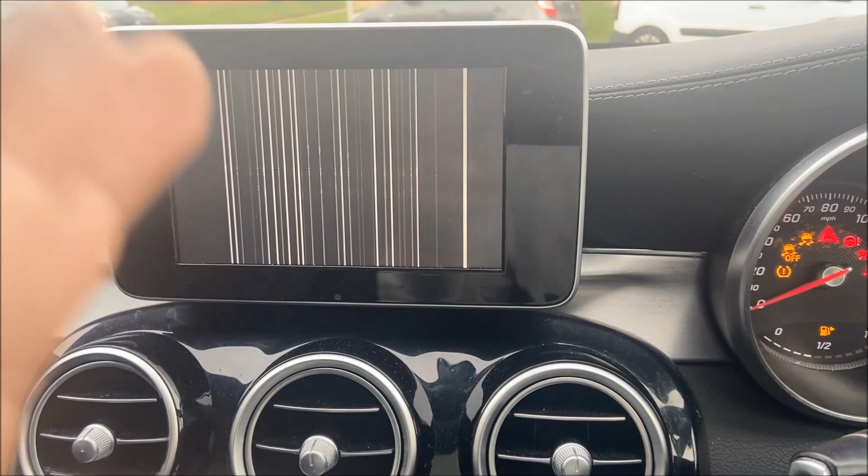Hello guys, here we are again with this Mercedes W205, 2015-2016 plate. The issue that we've got today is the head unit. It's giving us streaks down there. It's also half dimming. No functions are working. It's not allowing us to control anything, and it's just not working at all.

So what will happen is it will turn on to the warning screen, and then it won't go anything past the warning screen, and it will just start doing this little dance of lines, etc. So we're going to get it scanned up, we're going to see what the fault codes show, and we'll see what we can do from there.

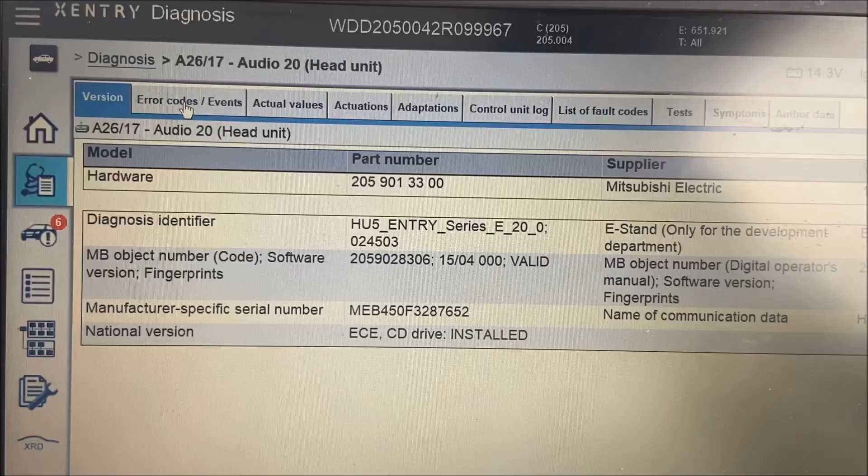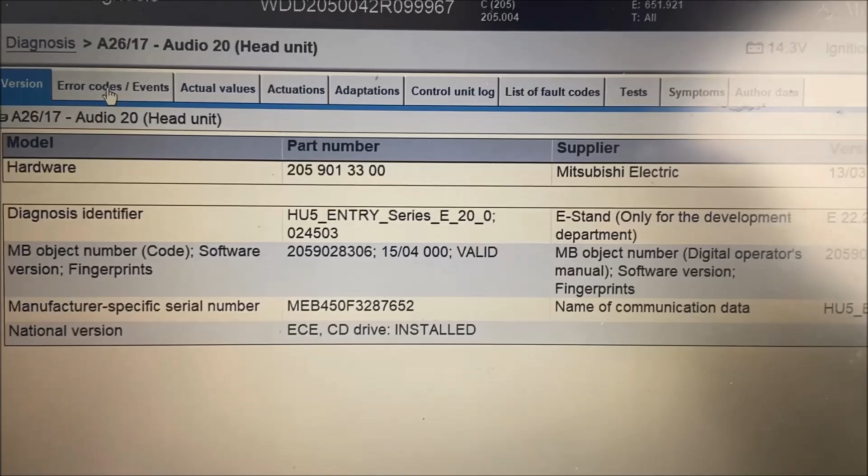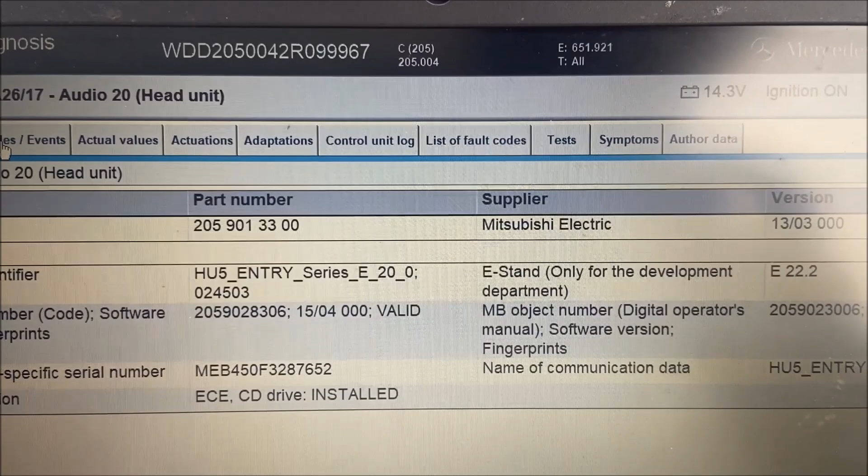So we've scanned the vehicle. There's a few other faults within the vehicle for other things, but we're not worried about them at the moment. We're just concentrating on the head unit itself. So here it's just displaying all the different values for the unit itself: what type of unit it is, the part number, serial numbers, and all of that. So this is a HU5 Entry unit. It's got nav, and it's an SD version of nav, so it's an SD card that sorts the nav out on here.

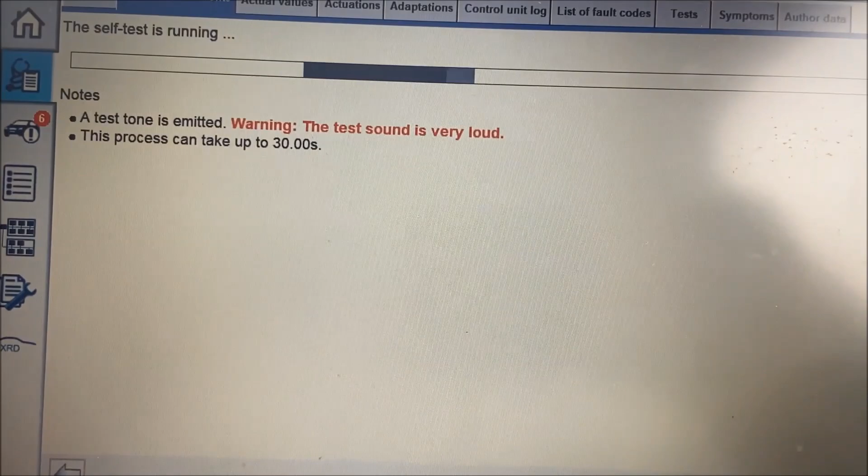So under the error codes, it's just going to do a quick self test, so we'll allow it to do that, and then we'll crack on. It's going to do a few loud sounds potentially. Obviously with our head unit the way it is, it might not do anything at all. But what we want to see is what fault codes are stored on here, and we'll work it out from there. So from previous things, this could potentially be a software related issue.

You can see on there it's got back into the reboot, it comes to this warning sign, and then this is where it sort of trips up again. But yeah, this could be a software issue, which means we could just update the software on the unit and everything could be golden, or it could be more of a hardware issue, which means that we'll have to remove the actual main unit that sits behind here, that basically lets us control the whole radio system.

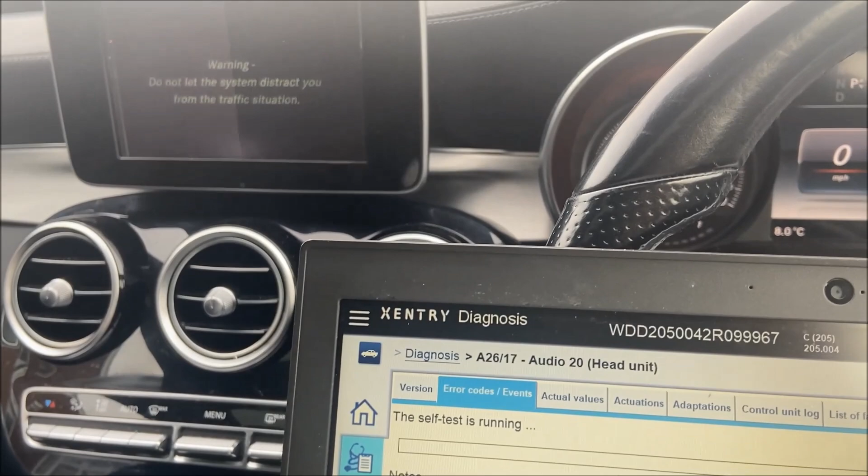And what we'll have to do with that is, if the customer opts for a brand new one, it's fairly straightforward, we'll have it programmed in. If they elect to go for a used unit, we'll have to get the anti-theft pin, and then do the programming, coding, etc as well. So we'll let this self-test do, then we'll come back to it once it's done its bits, and we'll go from there.

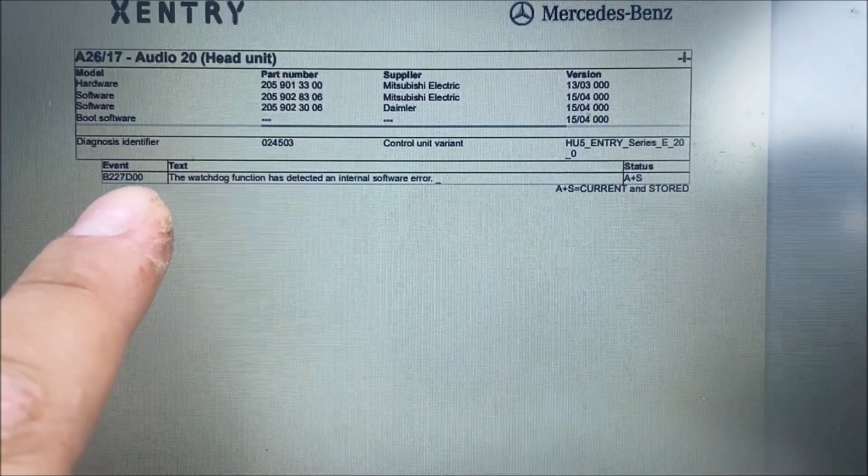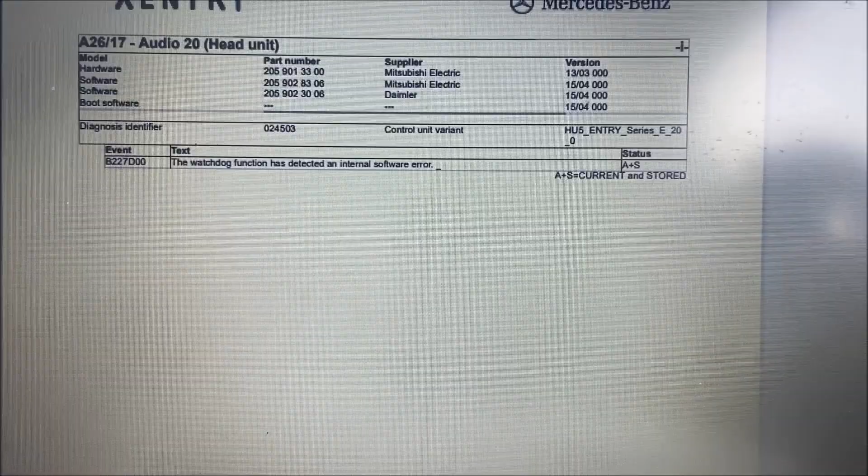So just looking back at the quick test I did, it's given us an error of B227D00. The watchdog function has detected an internal software error. So we've seen this before, where we've done a software update and it fixes the issue. Very rarely do we need to replace the head unit, but it is also another thing that can happen. So on the quick test, in the main error code screen, you can see there, watchdog function has detected an internal software error.

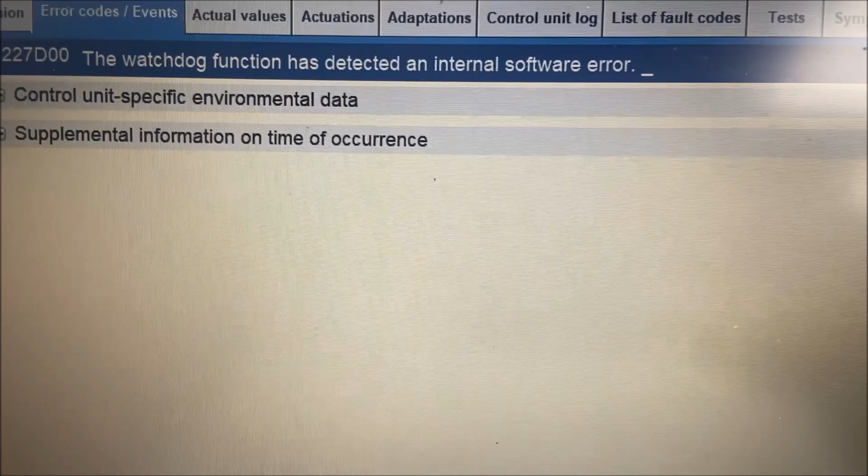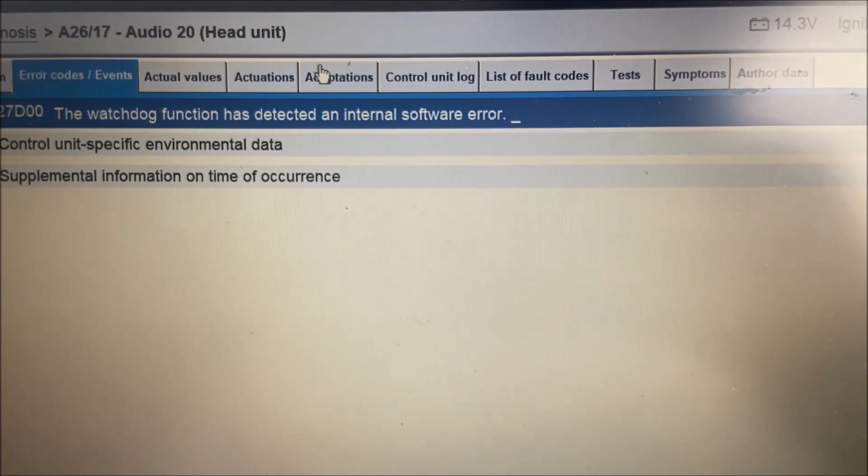If we run through the tests for this, it will ask us to do the reprogramming of this on here. Obviously there is a customer complaint, so we'll flow through this, but yeah, control unit must be programmed. So what we're going to do is go into the adaptations, and then just do a software update on here. We'll let this do, and we'll take you through the process of coding and programming the head unit.

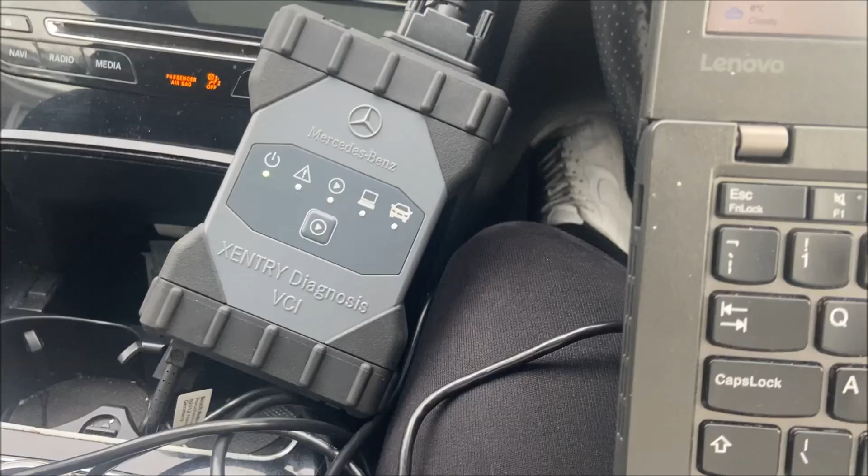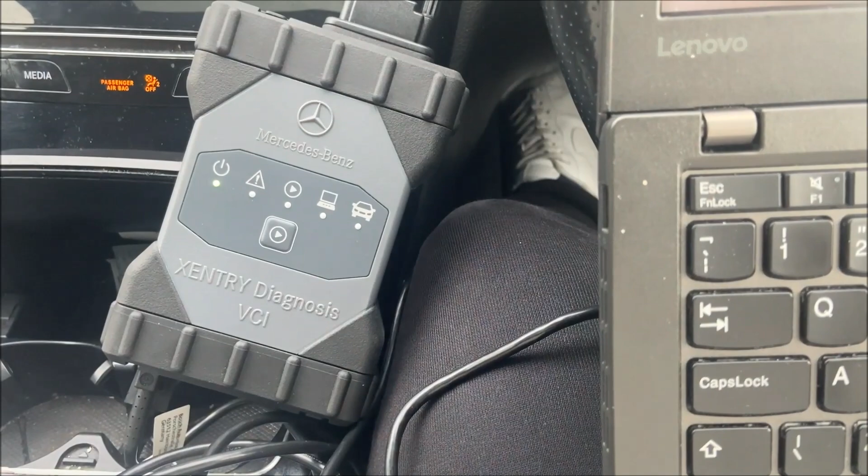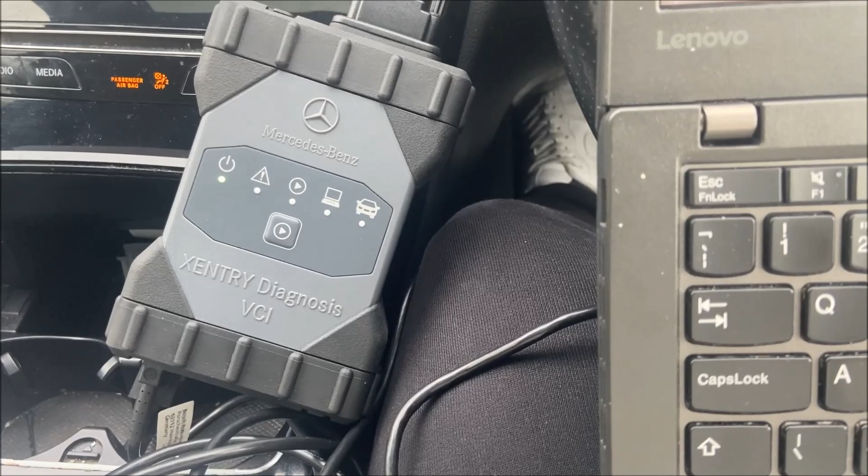So some people ask what we use to code, program, or SCN code our Mercedes vehicles. We use a genuine Xentry Diagnosis VCI, which is from Merc, as you can see here, and we've got an official license with Xentry. So all of our software is up to date, and all the updates for head units or any of the ECUs in the vehicle are up to date, because it's got from the central service with Daimler in Germany. It'll get the latest updates, latest SCN coding, whatever it might be that we're doing, but we use a genuine VCI.

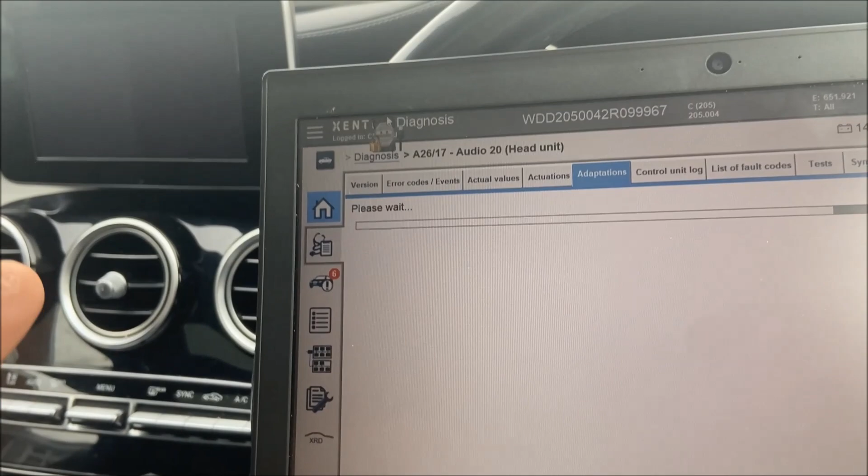So we've gone into adaptations, we've clicked on control unit software update. It's just running through the test bit now, determining the details of the unit compared to what the latest one is. Once it's got that information, we'll come back to it and we'll see if it needs updating or not. One of the issues, because this unit doesn't stay on for very long, it's struggling with the connection side to it. You can see it's currently off at the moment. So because it's in such a reboot loop, it's going to be an issue.

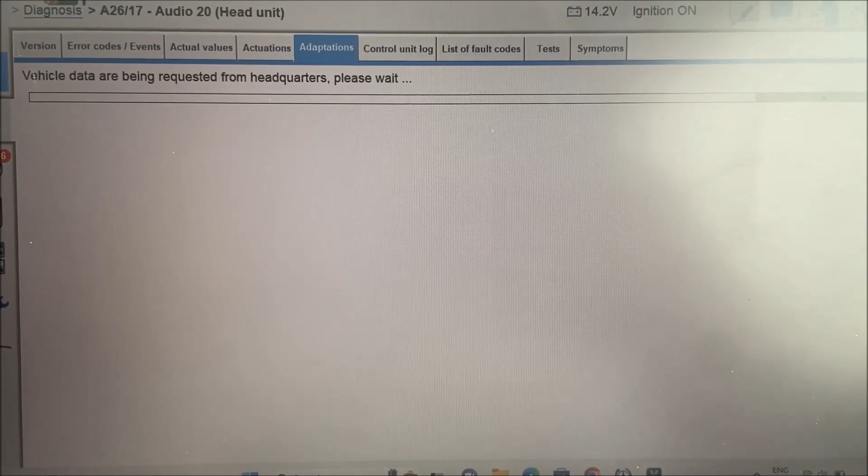But I'm just going to log in. Once I've logged in, it should take us to what we need to go to. So login is successful, so we can continue on here. This is going to check the user authorization and gather all the vehicle data, and we'll go from there.

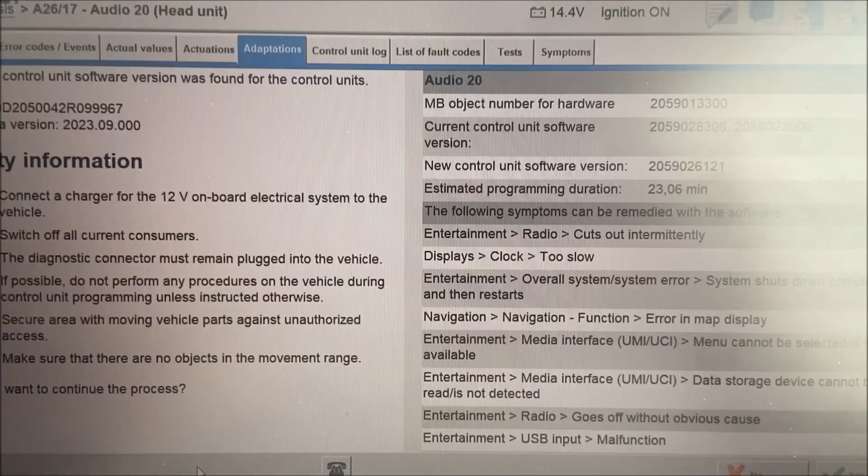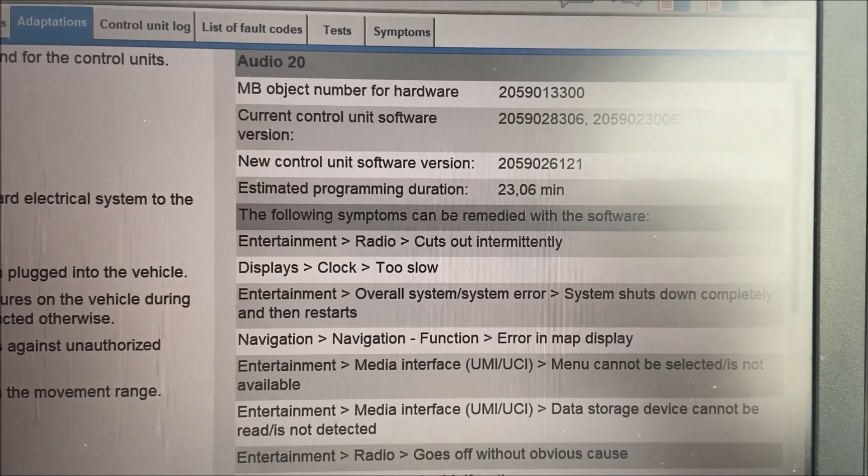Hopefully it will show us what we need to see. We can get it into the update mode and get it all updated. So we are here at the screen, and here it shows that there is an update for this. So that tells you the new control unit software version, which is just there.

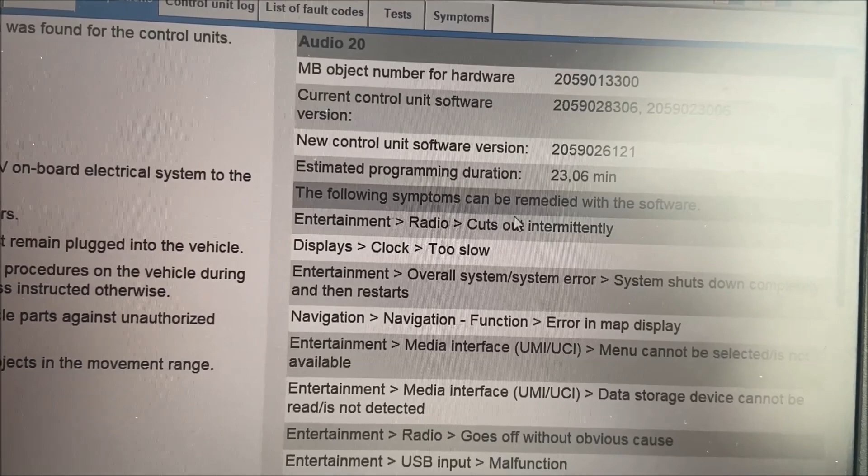That's our current one. I should say it takes about 23 minutes to update, and also it tells you that the following symptoms can be remedied with this software. So radio cuts out intermittently, it's too slow, system shuts down completely and then restarts, error in map display,

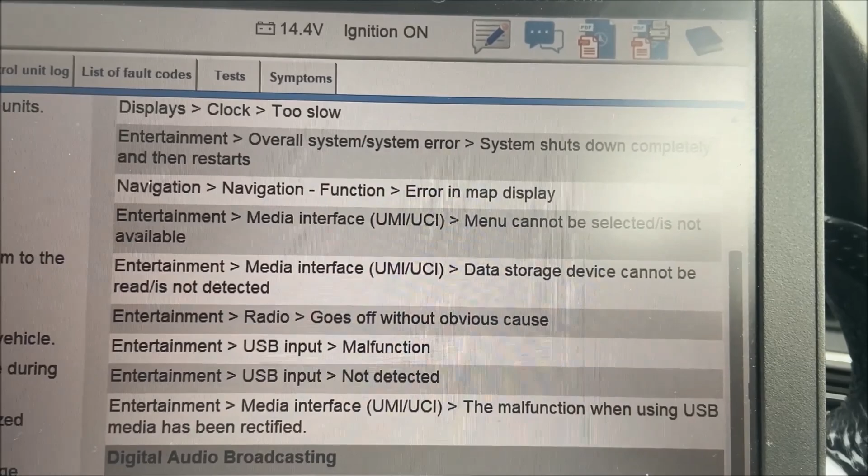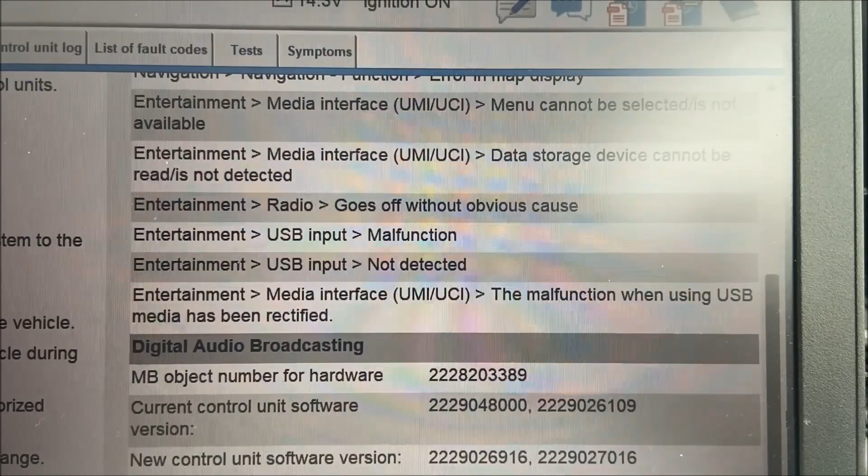menus cannot be selected or are not available, data storage device cannot be read or is not detected, it goes off without obvious cause, USB malfunction and USB not detected, and malfunction when using USB media. So there's a lot of symptoms that can be remedied with this software update. So obviously it is a known issue as well.

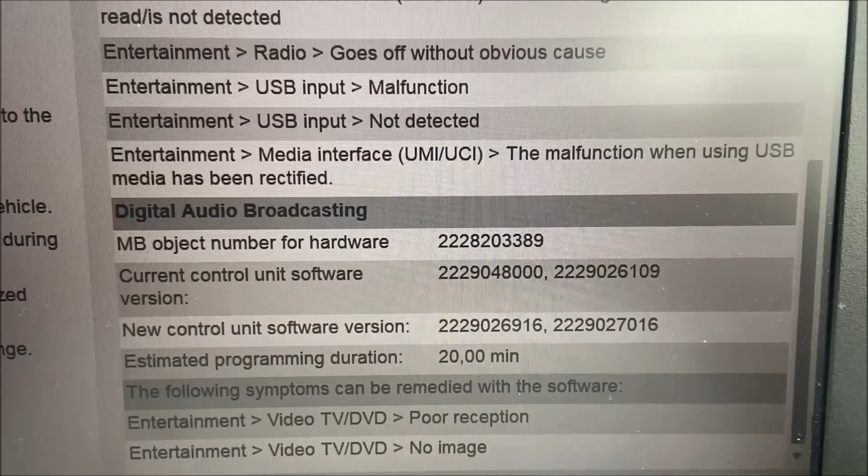Also down here there's an update for the DAB, which will take 20 minutes as well. So we're just going to get everything updated in one, so we can get it done. So we'll get that started and we'll go from there. So we've continued on there. We've chosen the symptom which best fitted. So I chose that the head unit restarts or shuts down and then restarts.

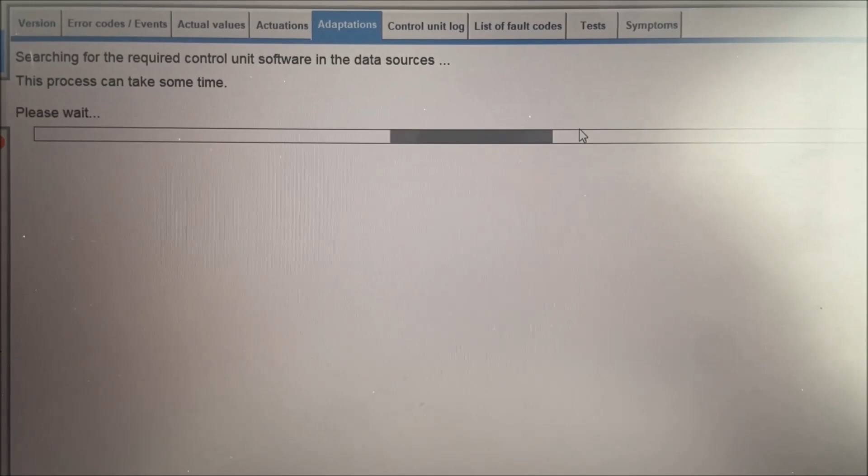It's just going to try and find all the software required, download it, and then it will start the programming phase. I'll show you a video of the programming side of things as well, but everything's hooked up. We've got a charger connected to the car so that it doesn't go low on the voltage, which can cause other issues as well. So everything's stable. There's a battery charger connected to the laptop as well, just so that doesn't go. So yeah, we'll let that do and we'll come back to it.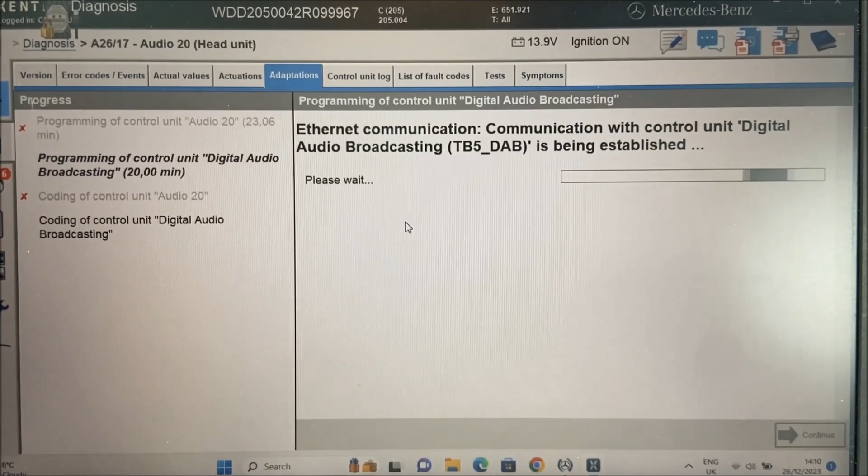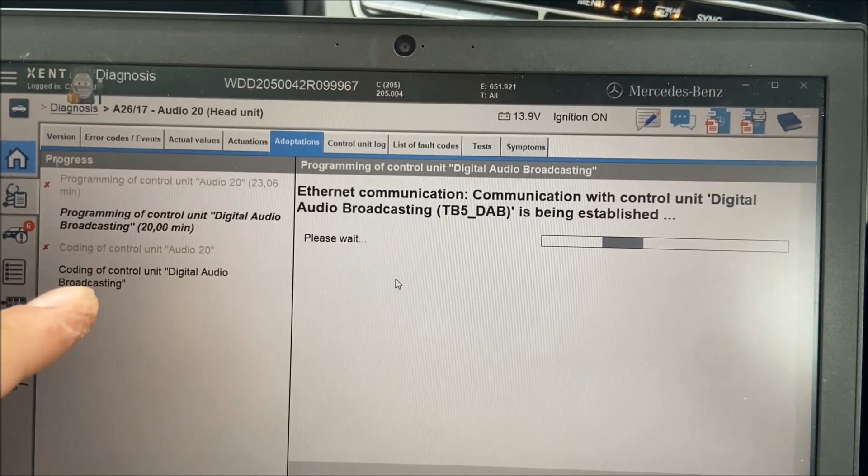so you can see what happens. So we've hit a bit of a brick wall. The programming of the control unit audio 20, which is the head unit, has failed. It went out of the bootloader active mode, restarted and went back to the main menu, as it's done now just there. So it's moved on to the DAB module, which it's just going to code as part of the process. So we're going to let that do, and then we'll probably come back to the head unit and see if we can program it again and go from there.

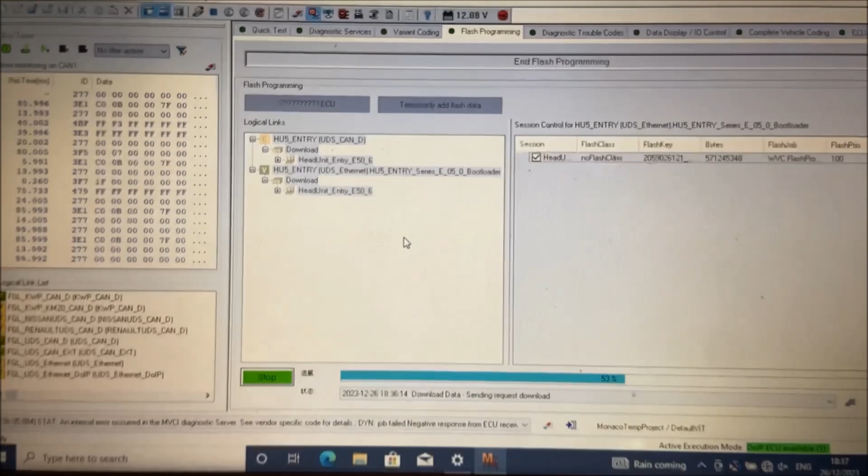So I'm here on the bench and I've connected to the head unit, the entry unit, on the bench. I've popped it into bootloader mode and I'm uploading the flash file manually, just to see if it makes any difference, to see if it'll put the unit back into commission, and hopefully it will work. So we're going to let this do, see what happens, and hopefully, fingers crossed, this will update the software and get rid of that fault.

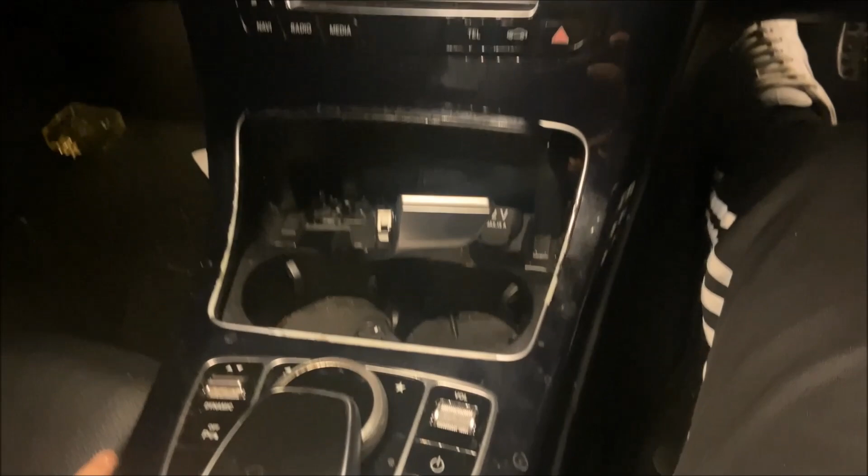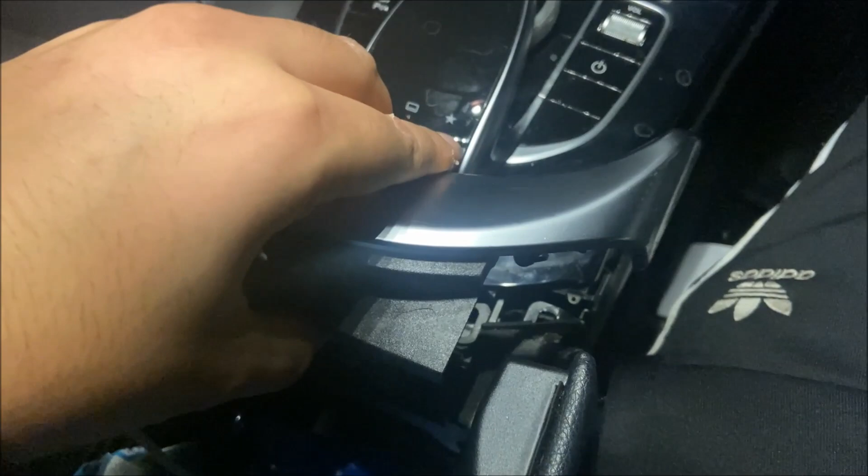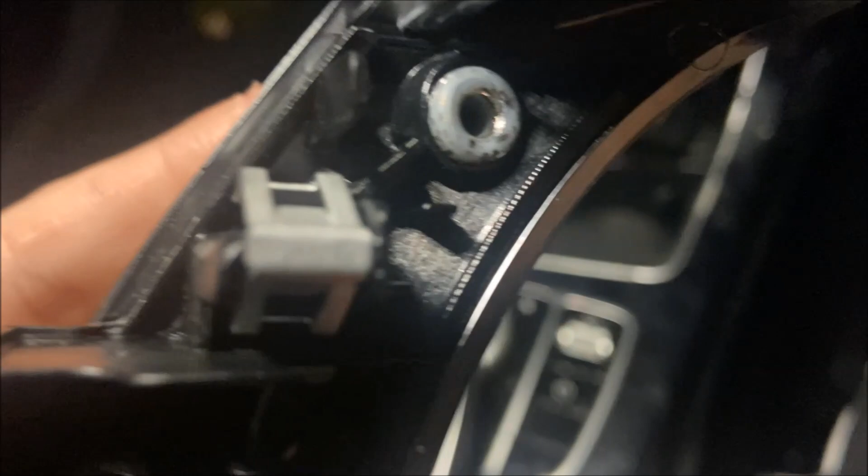So you can see it's got these two clips, one on that side and one on the other, and they're the ones that will pry up, and it will pop out. So there's one on that side and one on that side, and that will just unclip. It's best to use a trim removal tool and to go all the way around and just slot it straight up. Once that's up, there's 2 Torx screws just there and there.

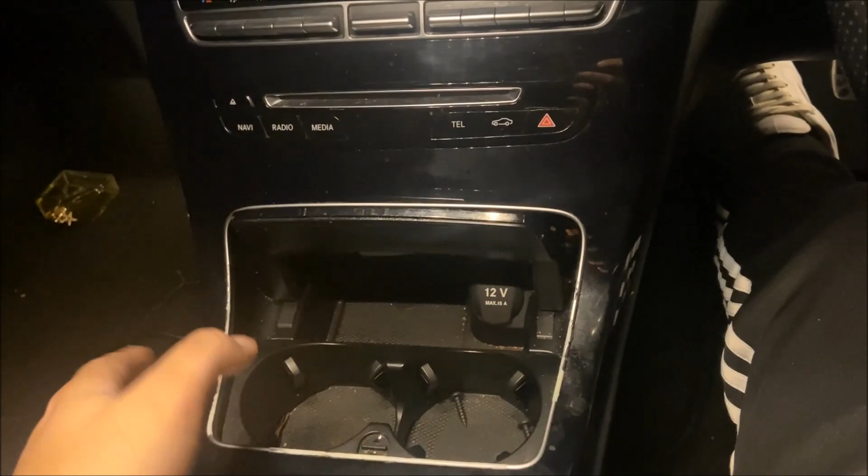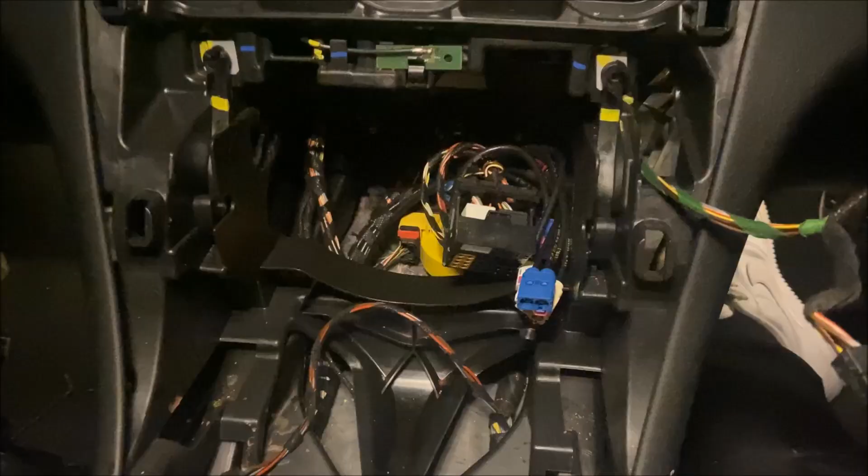They will come out, and once you've got them out, literally pull this up, and that will just release, and then it will pop out, and you can just slide it from underneath the screen, and it just pops straight out like that. Disconnect the wires underneath, and you'll have access to the head unit. Once you have them out of the way, you've got access to the head unit, so it sits in there.

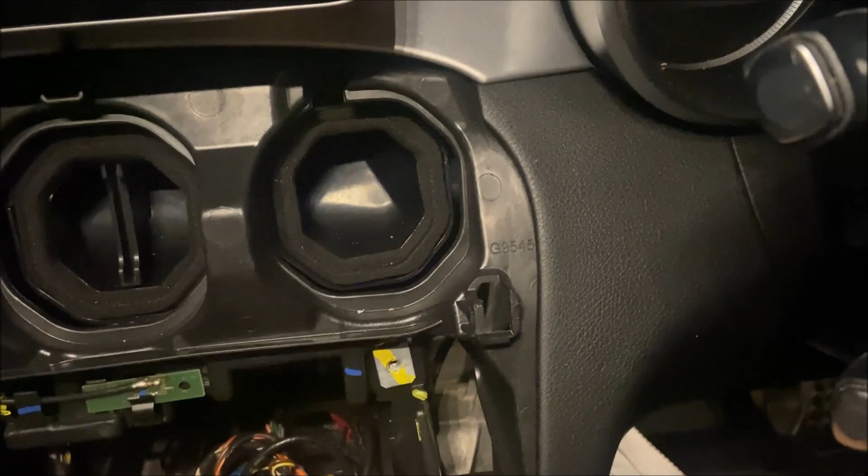There's 2 Torx screws that go into these clamps. Unscrew them, and then you can pull the head unit out, and this will pop forward, and you're all good to go. Once that's out, they'll fit back in, and you can fit the head unit back in. So just to test her out, she's plugged in. We plug one of the connectors back in to give this power, and the head unit is back on and running. So everything seems like it's working as it should.

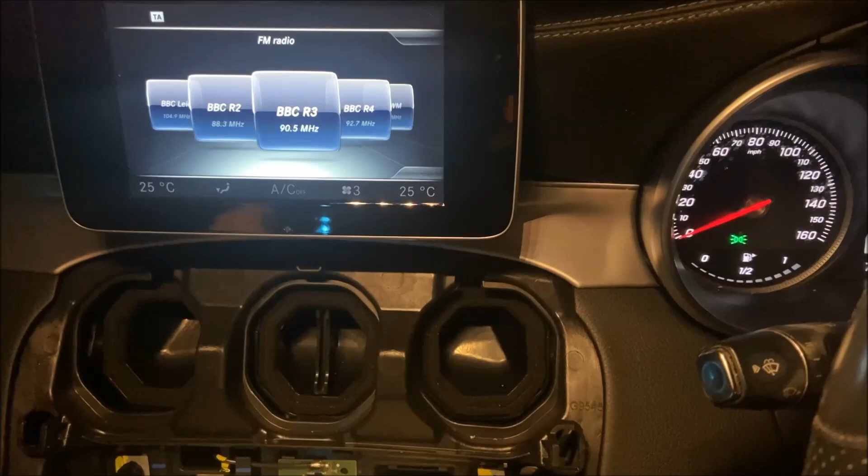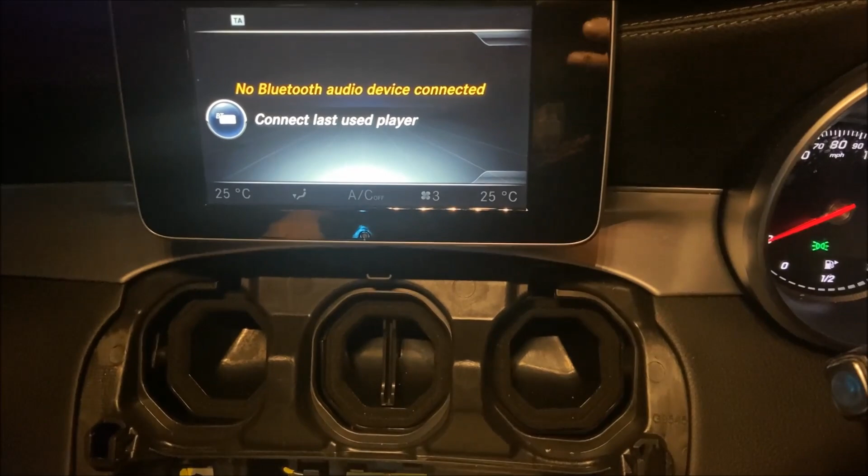So very happy with that. So it looks like the software update has fixed the issue. I know there was an issue doing it within the vehicle, but we've managed to do it on the bench anyway. So it looks like we are all good. Nothing else to worry about. Everything is working. We'll give it a test out and we'll go from there.